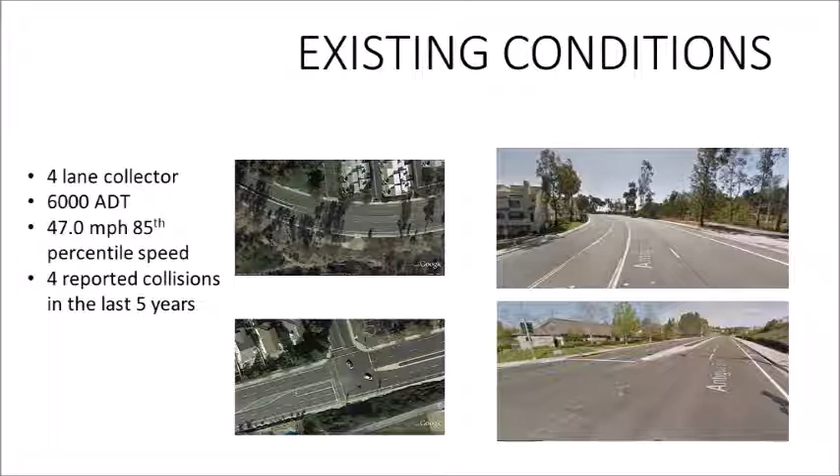Antigua Boulevard currently serves the community of Tierrasanta in the city of San Diego as a 4-lane collector. The volume on the road is currently at 6,000 ADT with no expected growth. The 85th percentile speed is 47 miles an hour with a posted speed of 40 miles an hour. In the last 5 years, there have been 4 reported collisions, putting it at 22% of the statewide average. The existing conditions of the roadway have brought up many community concerns and issues to address.

The main aspect that needed to be addressed on this roadway was the vehicle speed along the roadway segment. This roadway segment was on Antigua Boulevard from Santo Road easterly to Via Valarta. The capacity of the roadway greatly exceeds the volume as a 4-lane collector with a volume of 6,000 vehicles per day. Another major concern and issue to address was the lack of pedestrian facilities. Many jaywalkers were observed, and the pedestrian crossing facilities in the vicinity of the school and the park were inadequate.

The last community concern and issue to address was the lack of parking facilities. Outside the park, the school, as well as a trailhead on the roadway, had inadequate parking facilities and did not sustain the amount of cars that needed to use these facilities. Each of the community concerns were addressed in our design proposal.

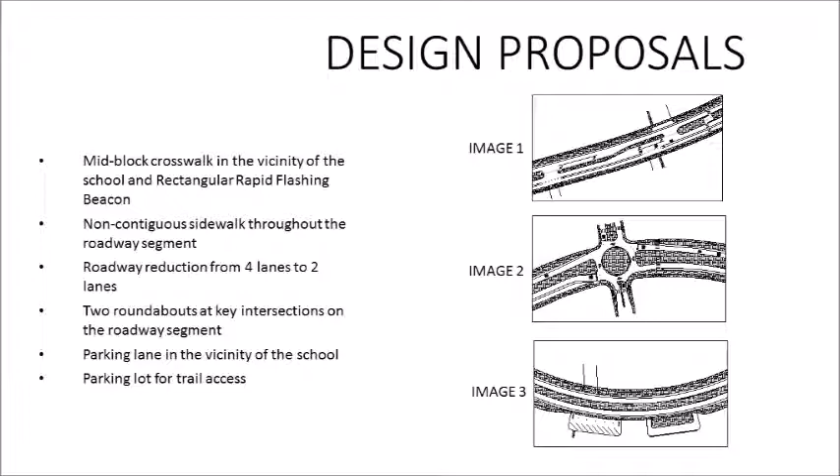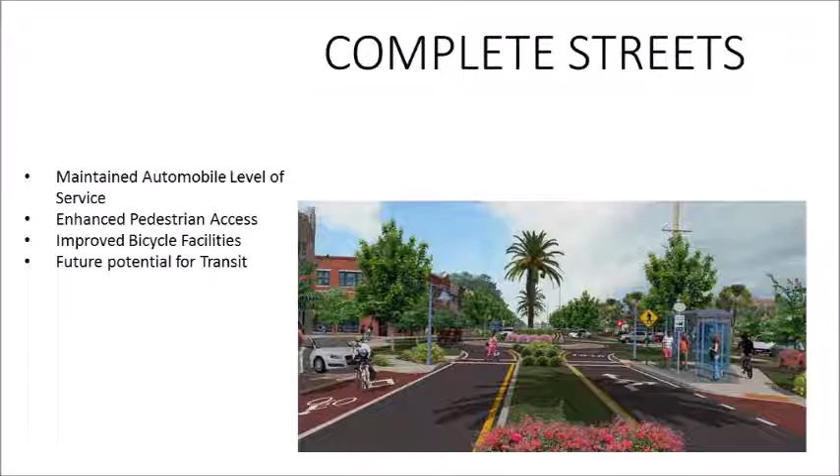Along with community concerns, our roadway proposal was designed with the Complete Streets Initiative. The Complete Streets Initiative's goal is to create a roadway with equal access to all users of the roadway, including pedestrians, bicyclists, and those using public transportation. In our design, we maintain the automobile level of service, we enhance pedestrian access throughout the segment, we improve bicycle facilities, and we created future potential for transit. The Complete Streets initiative integrates people into the roadway, creating equal access for multimodal users, creating a more active and efficient community.

The environmental report was prepared to verify and analyze the environmental effects for the proposed Antigua Boulevard Road Diet project. This report will identify the areas affected by construction activities and any environmental impact proposed by our design. The specific areas in the environmental report cover the existing conditions and planned changes for Antigua Boulevard.

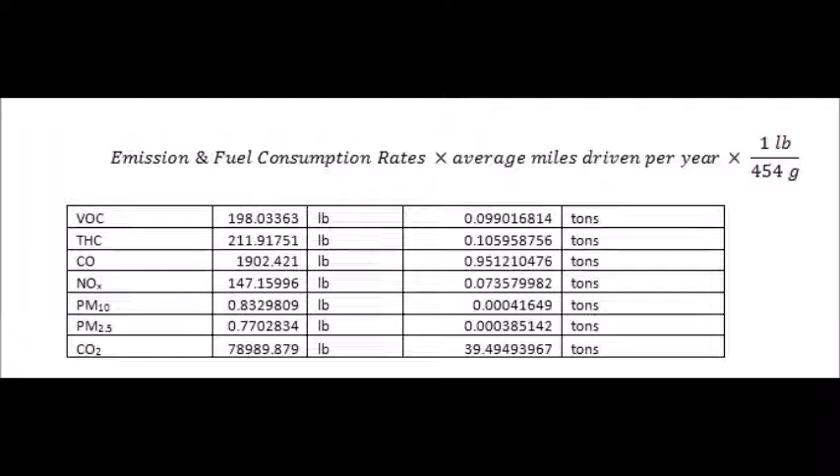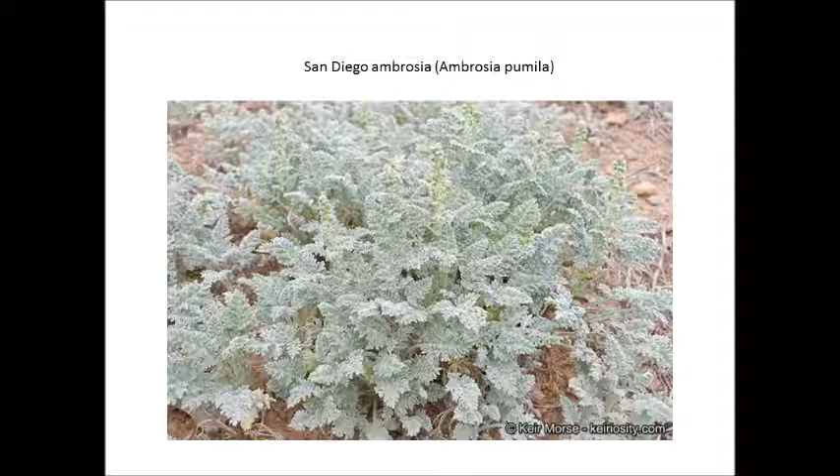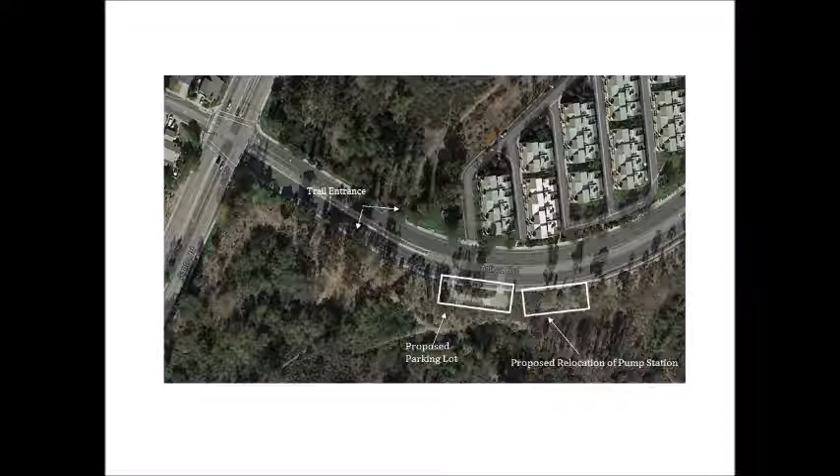At the western end of Antigua Boulevard, near Santo Road, there is a trail access. One community concern is the lack of parking lot around the trailhead. Currently, people are illegally utilizing the maintenance access road for the pump station as a parking space. The proposed design provides a parking location for hikers by relocating the existing pump station and maintenance further east. The relocation of the pump station and placement of the trail access parking lot will require the removal and relocation of 2 existing trees. Measures will be taken to ensure the protection of these plants during their relocation to mitigate the impact on the area.

Drainage is an important factor that correlates with roadway design. It is crucial to make sure that curb inlets and pipes can intake peak flows in the event of a storm to ensure that roads will not be flooded. For the proposed design of the Antigua Boulevard Road Diet, the existing and proposed runoff was calculated using the delineated watershed shown. As anticipated, the flows were reduced by 31 cubic feet per second as a result of the additional pervious area. The new areas that will increase the pervious area are the non-contiguous sidewalk, raised medians with vegetation, and the parking lot with permeable asphalt.

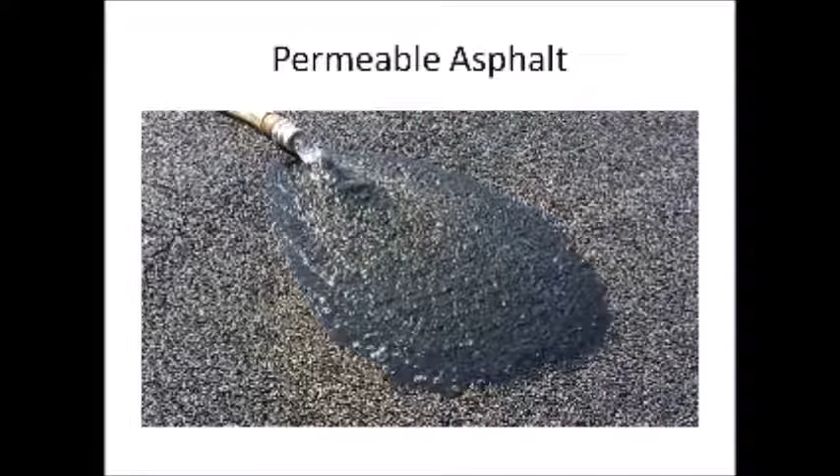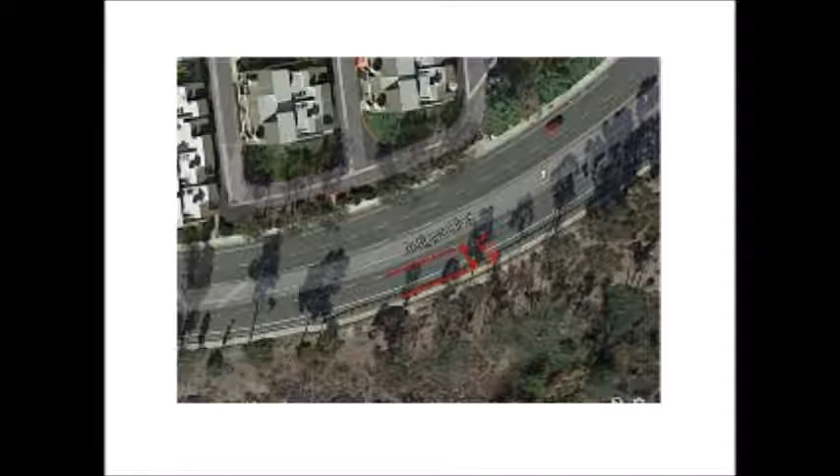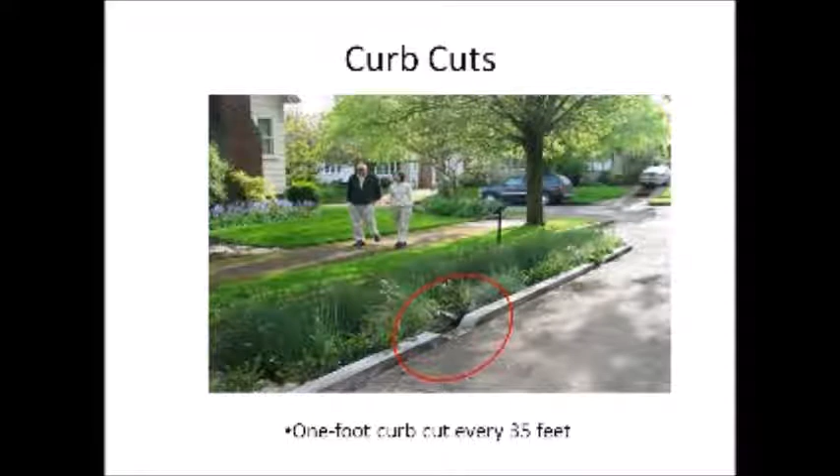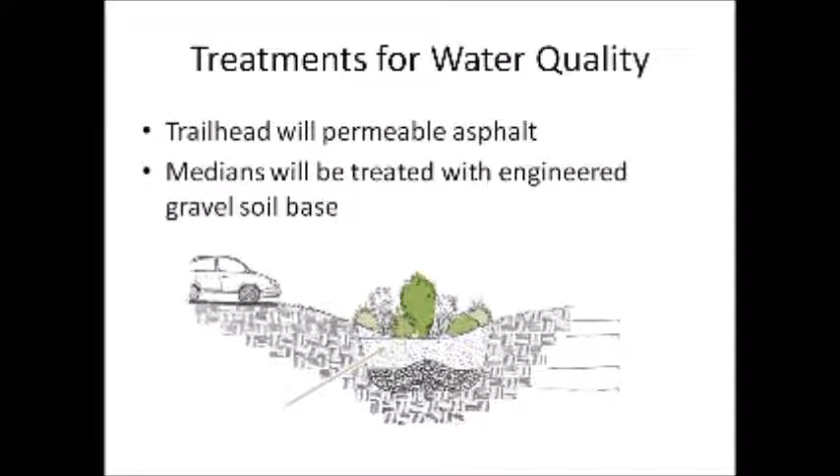No additional storm inlets will be added to the drainage system. The existing inlets along Antigua Boulevard will be relocated at an offset of 12 feet to match the proposed conditions of the non-contiguous sidewalk. To account for the runoff into the medians, a hydraulic study was calculated for the location of the curb cuts that will be installed. There will be 1-foot curb cuts installed every 35 feet for the mile stretch of road. Since the trailhead is located near the canyon, runoff from the proposed parking lot will be treated with permeable asphalt. The discharge that will be entered into the median will be treated through an engineered gravel soil base. With the new types of treatment, the proposed design will overall improve the water quality.

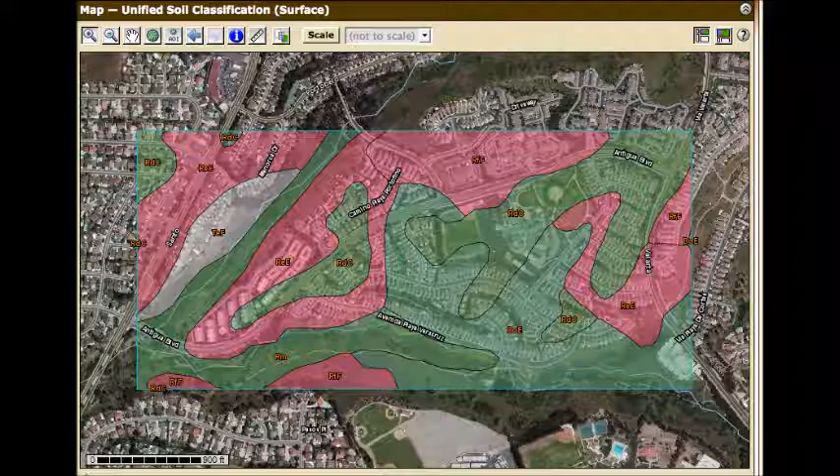This geotechnical report covers the basic geology and soil types in the Tierrasanta area. The map shown is taken from the Natural Resources Conservation Service and shows the basic soil types along Antigua Boulevard. 3 major types of soils are located along the length of the road. From west to east, they are classified as Redding Cobbly Loam, SC, Redding Gravelly Loam, GC, and Diablo-Olivenhain Complex, CH. No major excavation is needed for the project. The rectangular rapid flashing beacons will lie on SC type soil, and we are using a 4-foot deep embedded round footing with a 1-foot diameter for each beacon.

The net direct site cost for the project is estimated to be $3.1 million. The breakdown of the cost is roughly as follows. Site preparation, $1.8 million. Site improvements, $1 million. Site civil and mechanical utilities, $93,000. And site electrical utilities, $41,000.

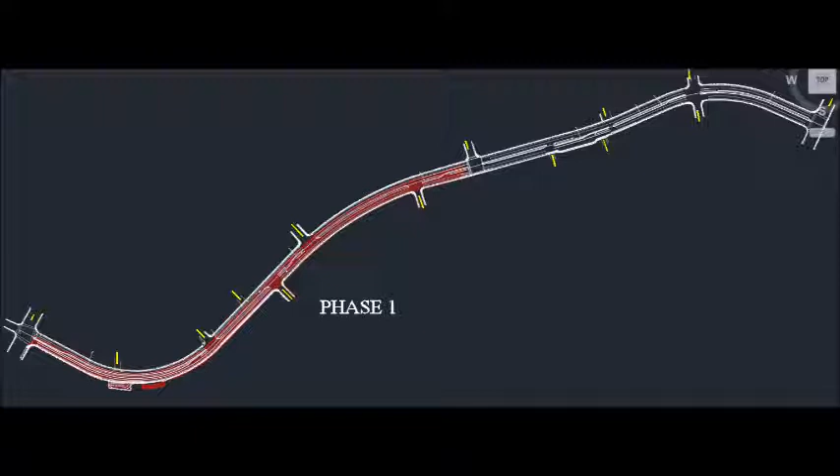The construction was ultimately broken down into 4 phases. The first phase began at Santo Road and ends essentially halfway up Antigua Boulevard before the first roundabout. The second phase completes the second half of the street up to Vallarta Road. The last 2 phases go along the westbound side of the road, starting at Vallarta Road towards Santo. Phase 3 and 4 are split at the same station as Phase 1 and Phase 2.

This presentation was prepared for Jim Hoyt and James Miller as a final submission of our Capstone Senior Design Project for CIVE495. Thank you for watching. We hope